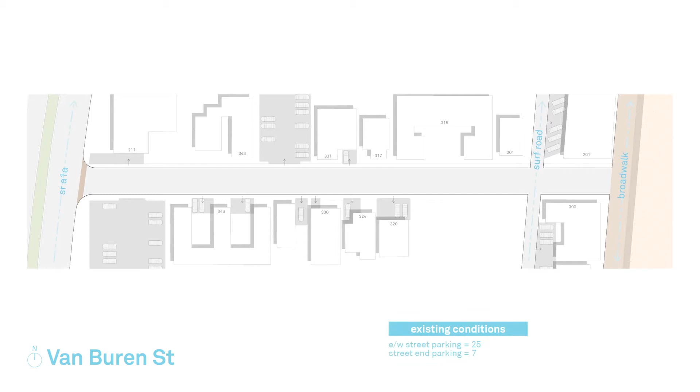The information provided is based on conceptual designs and is subject to minor revisions during the engineering, regulatory, and construction design phase. Currently on the street, there are unsightly overhead utilities along with damaged patches of asphalt on the roadways and sidewalks.

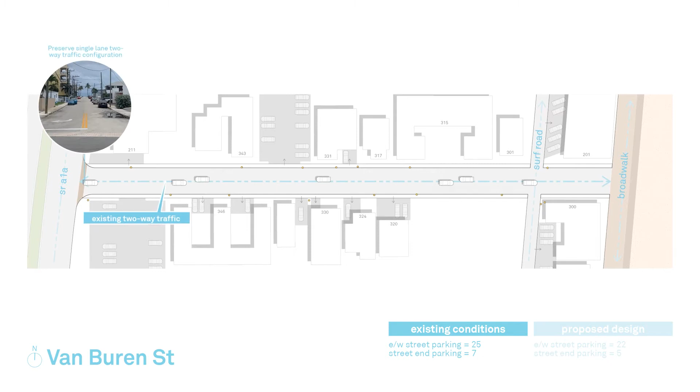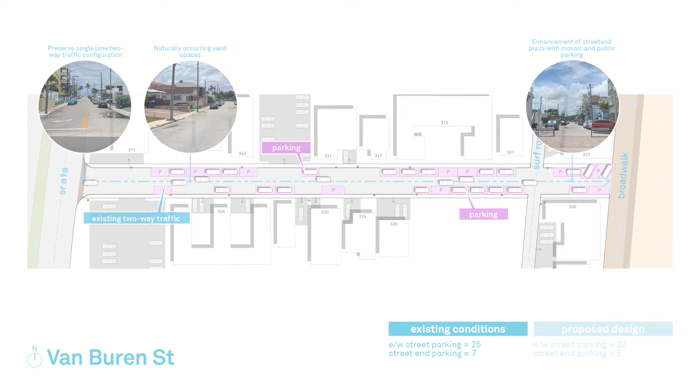The existing streets are two-way traffic with parking on both sides of the street. Due to the nature of implementing the undergrounding of overhead utilities and streetscape beautification, the parking spaces, regulatory agency oversight, public lighting, and landscape improvements will be markedly different than the current conditions as seen today.

Each street is a custom design based on existing conditions. The proposed design will incorporate newly constructed sidewalks and roadways with brand new paving that will extend onto the street ends.

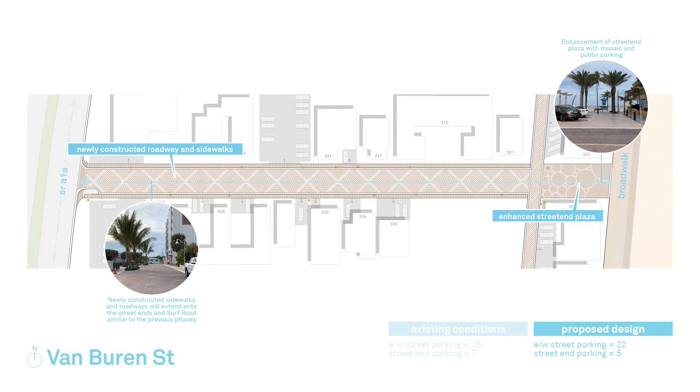The photos shown depict images of the completed streetscape from previous phases 1 through phase 3 and are an example of the same types of lighting, hardscape, landscape, and streetscape improvements that will be implemented on this street and the entire phase 4. As requested by the community, the current traffic pattern is being maintained, i.e., the two-way traffic with a single lane in each direction and parking on both sides of the street.

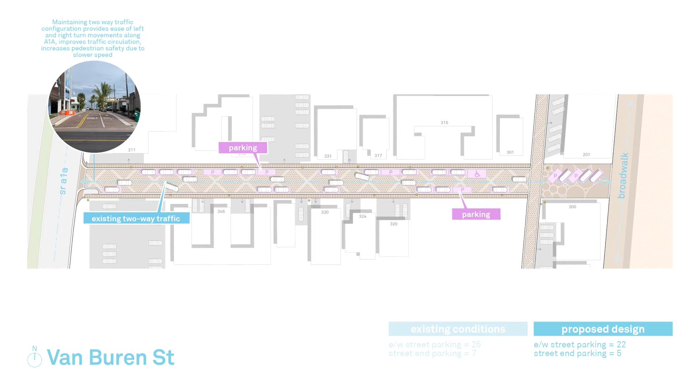Existing driveways will act as natural yield spaces, an area where a car can pull into to allow another vehicle to pass by.

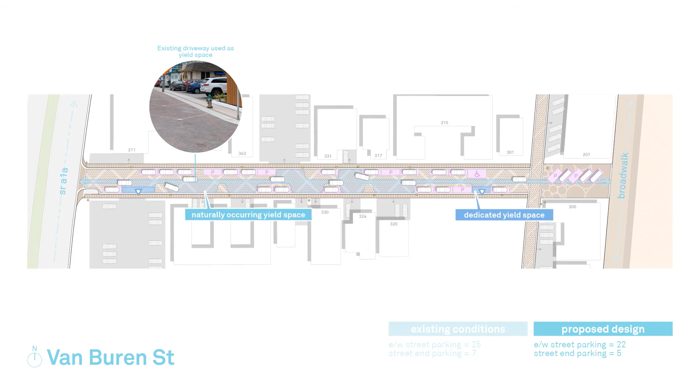Encroachments into the row have been addressed by the city passing an ordinance reducing the amount of space required on a private property for parking, i.e., if there is 16 feet 0 inches in a perpendicular configuration and/or 8 feet 6 inches for a parallel parking space, then these spaces will continue to function as parking on private property.

In addition, if private property owners have wheel stops or small garden walls which can be reconfigured to allow for additional private parking, CRA staff will meet with those private property owners.

The undergrounding of overhead utilities will result in utility transformers that will be placed in strategically located landscape islands to optimize service points to adjacent properties and minimize the loss of public parking spaces.

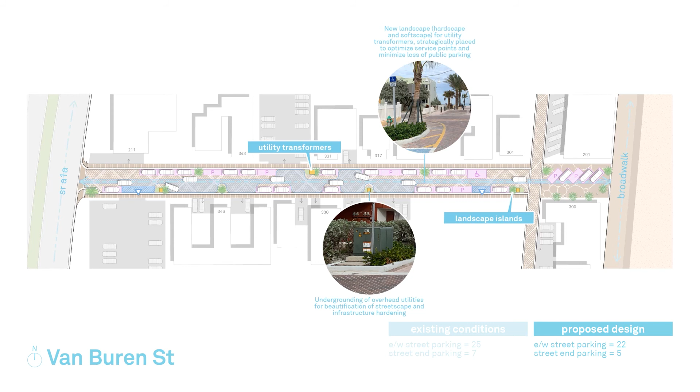Street lighting will also be upgraded to LED marine turtle-friendly lights as seen in the previously completed streetscape projects from Tyler Street to Thomas Street and Iris and Jasmine Terraces.

The design of each street maximizes retaining as many public parking spaces as possible, while dedicating the areas needed for transformers as part of the undergrounding of overhead utilities.

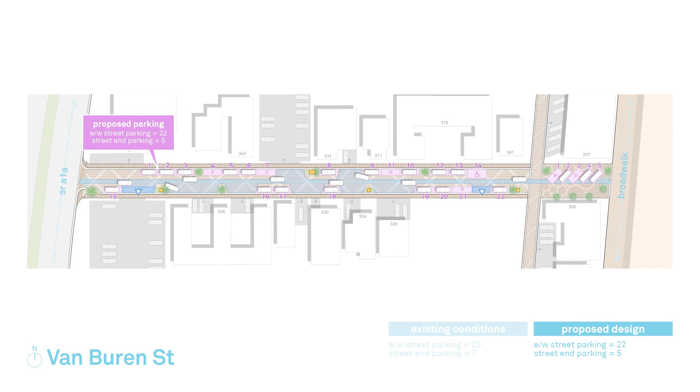For Van Buren Street specifically, Broward County regulations and FPL equipment needs result in a net loss of 5 spaces, i.e., 3 parking spaces on the east-west street and 2 parking spaces at the street end.